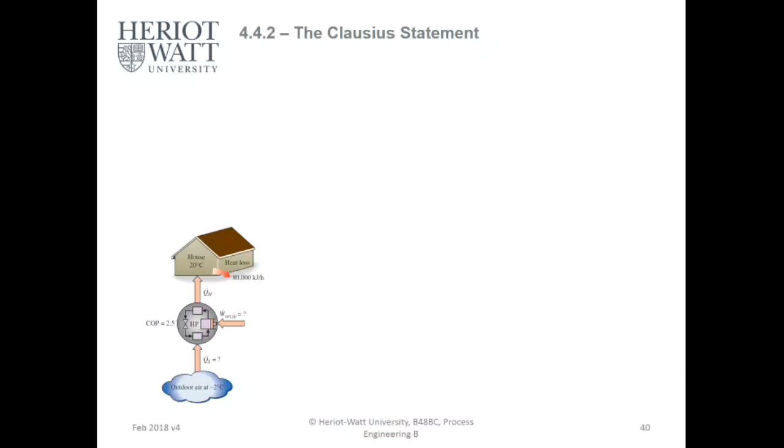Let's start with the Clausius statement. This is a continuation of the Kelvin-Planck statement, and it states that it is impossible to construct a system that operates cyclically while transferring heat from a cooler to a hotter body without a net quantity of work being supplied to the system by the surrounding.

Now, when you add this net quantity, you have a refrigeration system, HVAC system, your heat pump system. We'll get there in a bit, but let's go through the arbitrary theory behind what a Clausius statement is and how it applies to the Carnot cycle and how it applies to the thermodynamics of a cycle where you're trying to transfer heat from a cold source to a hot source.

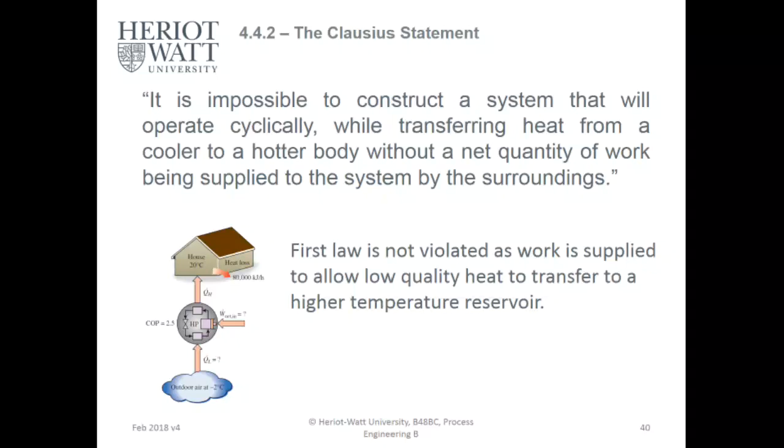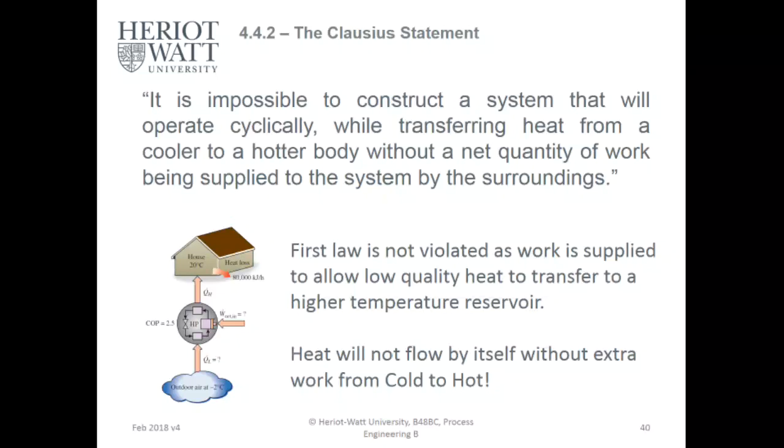Heat will not flow by itself without extra work from cold to hot. You can't heat up your coffee in atmospheric temperatures when it cools down. So heat flows from hot to cold spontaneously.

The Clausius machine, which is impossible, states that spontaneous transfer of energy, heat from a cold reservoir to a hot reservoir - it's showing that to transfer heat from a lower to a higher temperature reservoir, we must pay a penalty. We need to do some work. We need to pay the cost of that transfer.

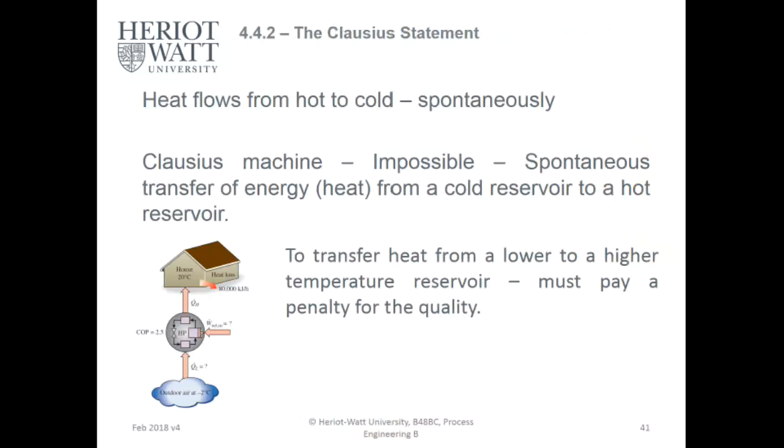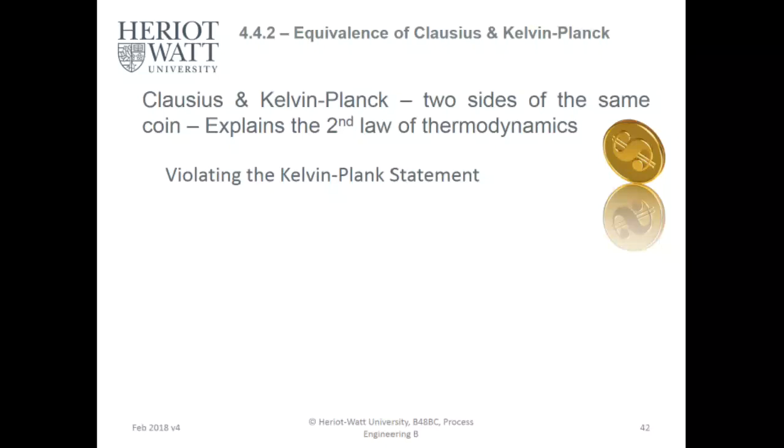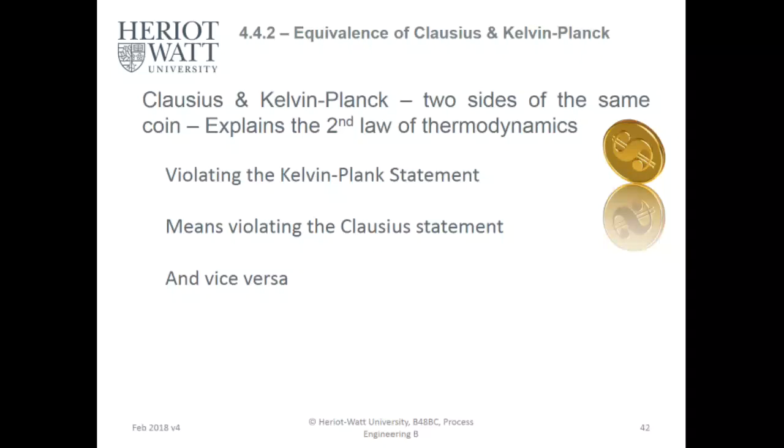So the Clausius and the Kelvin-Planck are effectively two sides of the same coin. They explain the second law of thermodynamics, approaching it from two different sides. If you violate the Kelvin-Planck statement, you'll violate the Clausius statement, and vice versa. It's like the laws of robotics by Asimov - you cannot break these laws. If you break any of them, it automatically violates the other laws. You've seen I, Robot, I assume, at least, if you haven't read the book.

The heat engine has a thermal efficiency of 1. This is in violation of the Kelvin-Planck for this system. So you have all the heat converted to work here. So you have a heat engine with 100% efficiency, and all of this heat is converted to work, being input into the refrigerator.

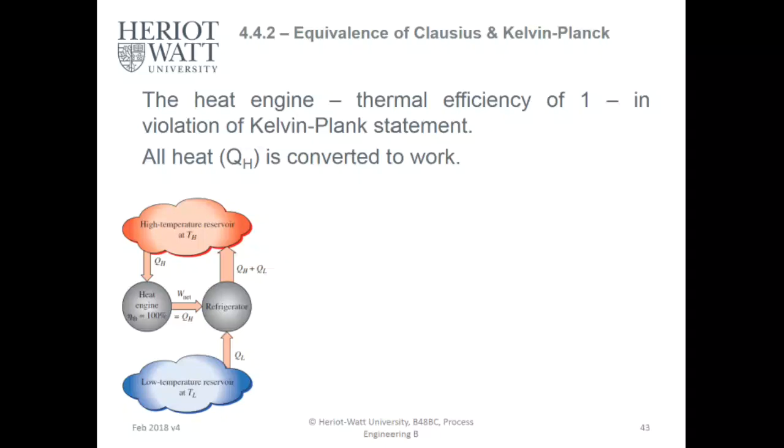Now, work is supplied to the refrigerator. It removes heat, QL, from a low source heat reservoir, so your lower quality heat, and transfers it to a higher temperature reservoir. So basically, you're cooling this in. You have cooling inside the refrigerator, but you need to dissipate that heat.

Remember, if you have a refrigerator, it's cold inside, but behind it it's quite warm. It's because it needs to dissipate that heat somehow. So it removes the heat from the cold side, from inside the refrigerator, and throws it out. Remember, energy cannot be created or destroyed. You can transfer it, but you can't destroy it. And you reject this heat, which is the lower quality heat, plus the higher quality heat to the higher temperature reservoir.

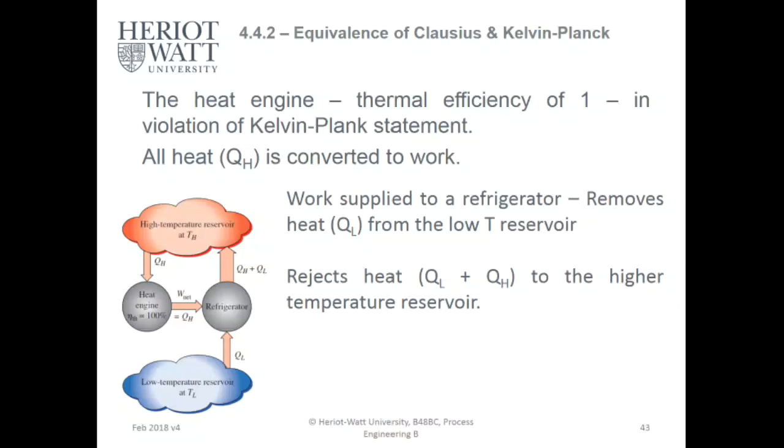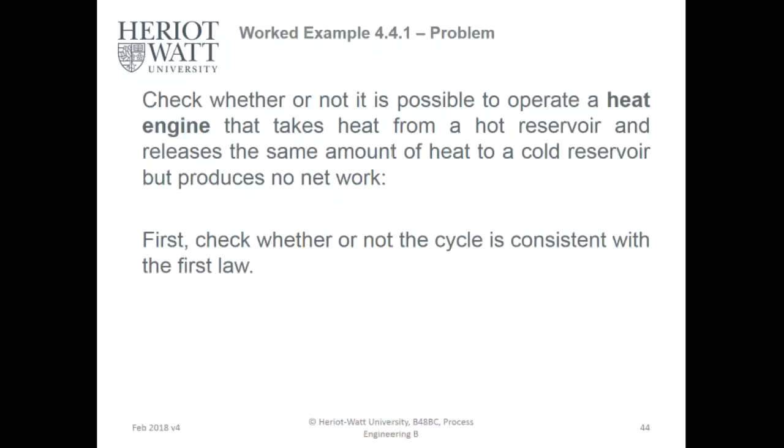Now, check whether or not it is possible to operate a heat engine that takes heat from a hot reservoir and releases the same amount of heat to a cold reservoir but produces no work. Is this possible? First, check whether or not the cycle is consistent with the first law, and then check whether or not this cycle violates the second law.

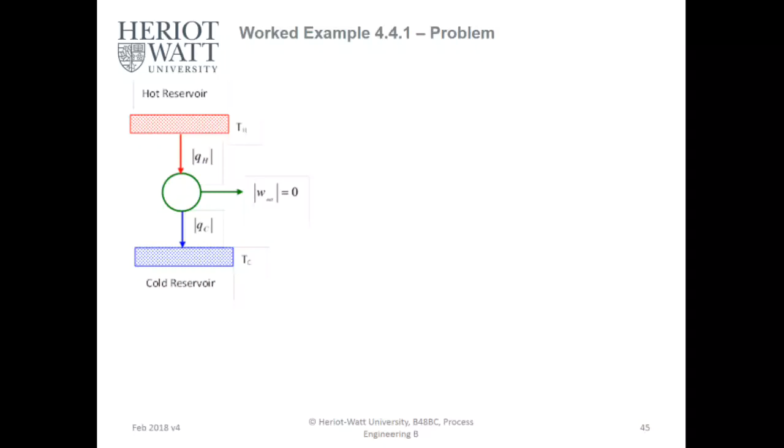So the heat is spontaneously flowing from a high to a low temperature. Now this is just to emphasize the point - I know it's quite arbitrary and a lot of you understand it, but just so it's emphasized. No work is done by this cycle, so think of it as your hot coffee cooling down while you're drinking it. So the heat is transferred to the atmosphere, despite the fact that there's some form of insulation on your Costa coffee cup.

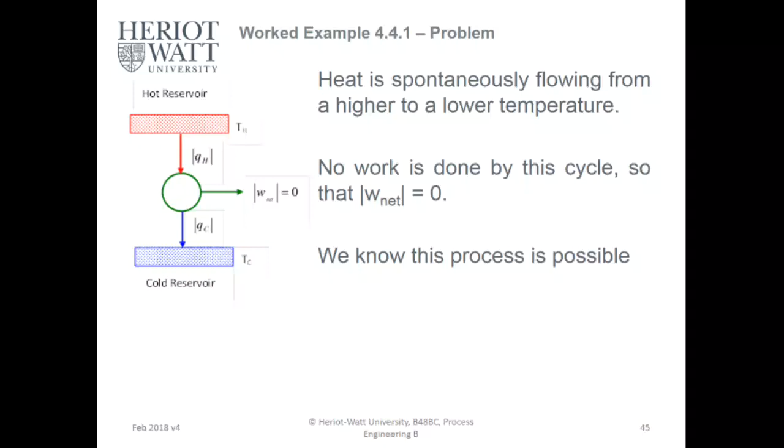We know this process is possible. You've seen it - you guys are seeing it at the moment. The first law may be applied to this cycle by examining the energy flows entering and leaving the working fluid. And the energy flows are absolute values, and their directions are indicated by the arrows.

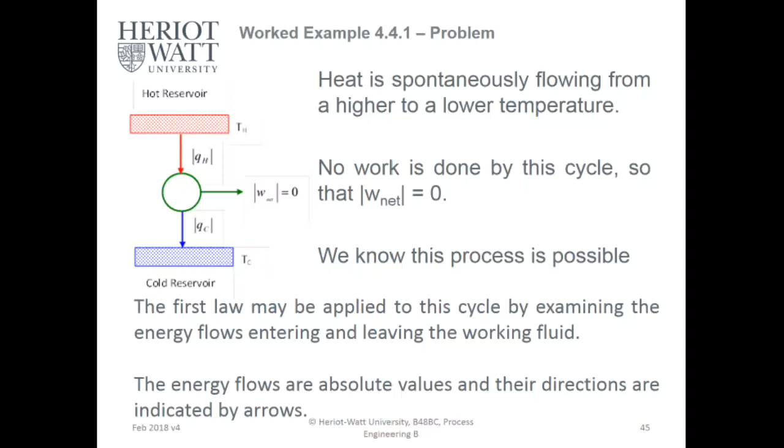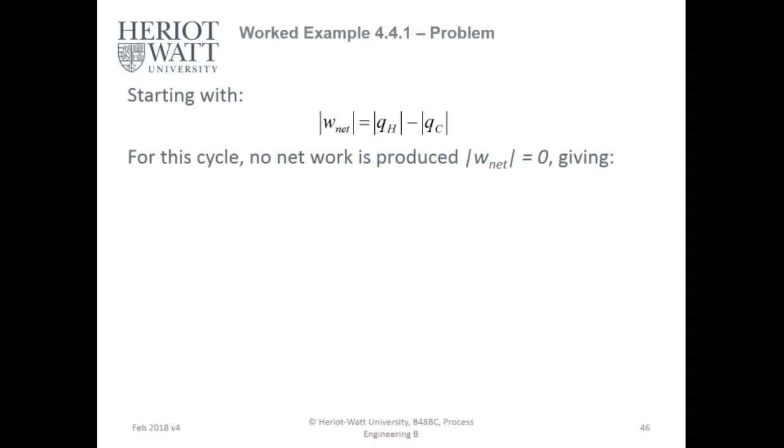So if you see from a hot reservoir going to a cold reservoir, or your coffee cooling, your hot reservoir is your coffee, and the cool reservoir is the classroom. Starting with net work equals the higher quality heat minus the lower quality heat, or the quantity of heat. For this cycle, no net work is produced, so net work is 0, giving QC equals QH.

This heat engine, even though it's useless because it's not doing any work, does not in any way violate the first law. Energy is still conserved even if no useful work is done. So you're transferring all the energy from your coffee to this room, but you're not destroying any energy. You're just heating up this room, which is then cooled down by the HVAC system.

So you need to remove that heat. You do work - that's your refrigeration part. So you're actually contributing to global warming right now.

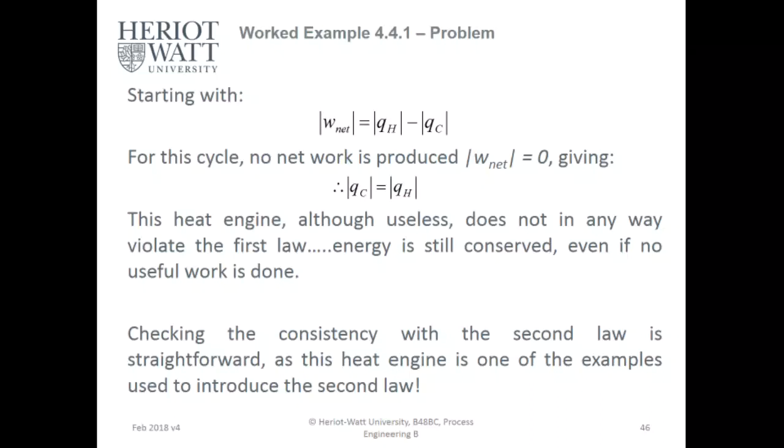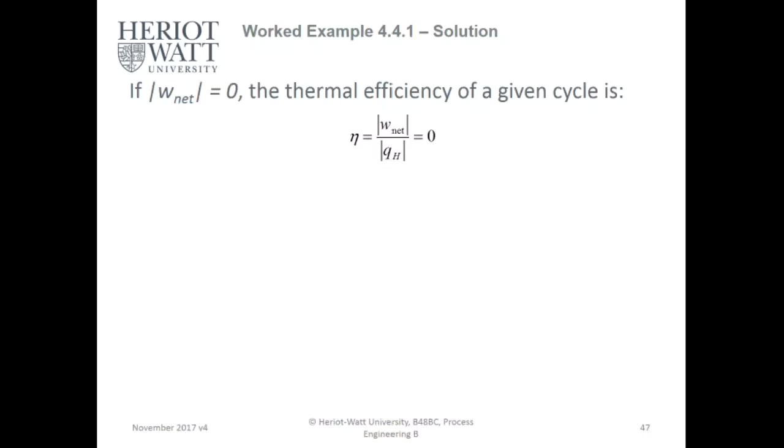Checking the consistency with the second law is quite straightforward. This heat engine is one of the examples used to introduce the second law. So if you have zero amount of work, the thermal efficiency of this cycle is the net work over the higher energy, which equals zero.

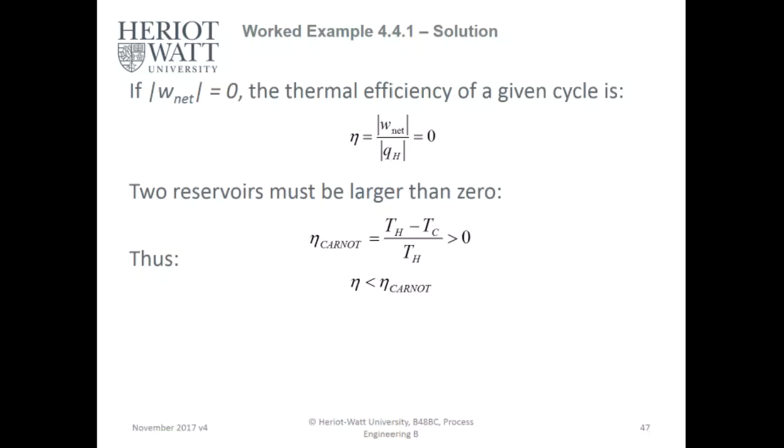Or rather, it's not 100% efficiency, but you're losing absolutely no heat. It's never 100% efficiency. So the cycle is feasible, it's spontaneous, and doesn't violate the second law because it's less efficient than the Carnot cycle. And it's a reversal, or a reversal of its reversal.

A Clausius machine is not possible. So you can't reverse heat back into your coffee.

The results also show that heat transfer through a finite temperature difference is irreversible. So again, coffee's cooling down, you can't heat it up at room temperature without some kind of work input.

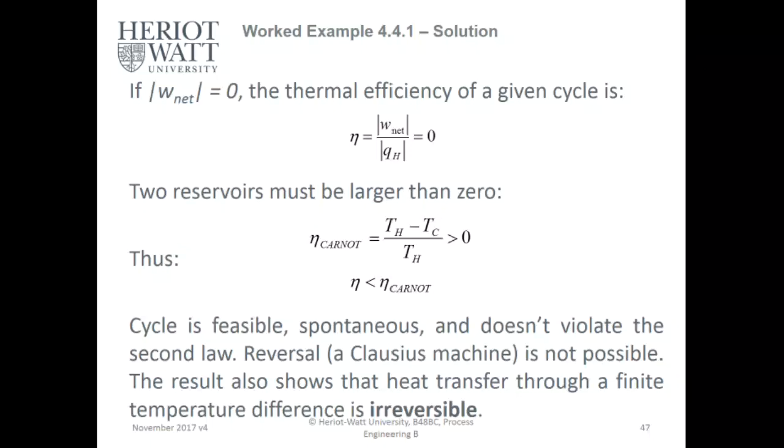Looking at the energy quality, you can see that the cycle transforms higher quality heat at a higher temperature to lower quality heat at a lower temperature. Now remember, higher quality and lower quality are conceptual terms. They're not going to come up in the exam, but the reasoning helps you understand what heat pumps and refrigeration systems are.

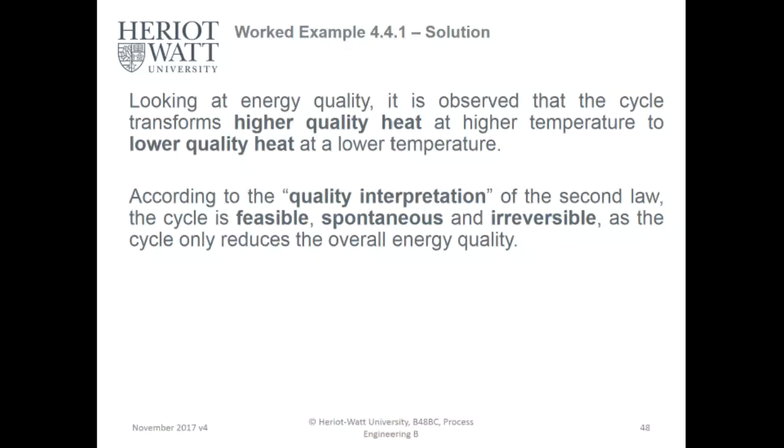According to the quality interpretation of the second law, the cycle is feasible, it's spontaneous, and it's irreversible. So all real life processes are irreversible, as the cycle only reduces the overall energy quality. It's irreversible when you reduce the overall quality of the energy.

And the cycle is irreversible because it extracts none of the work that transferring this amount of heat is capable of doing. The only time you can achieve this is in a perpetual machine, which again is impossible thermodynamically.

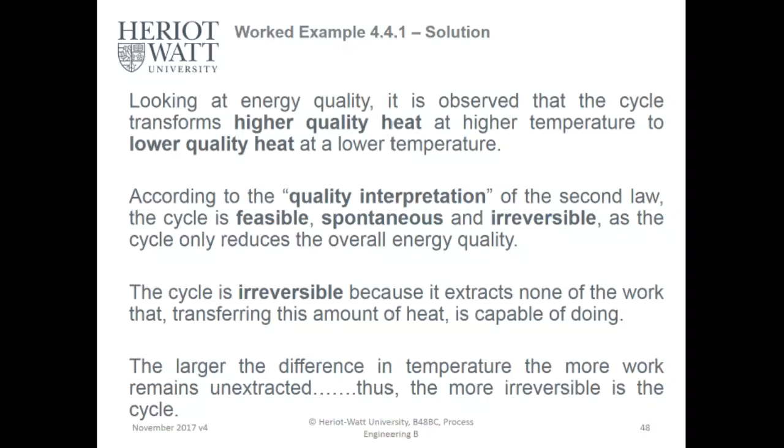So the larger the difference in temperature, the more work remains unextracted, thus the more irreversible the cycle. So the larger your temperature differences, the harder it is to go back, because you can transfer more of this high quality energy to a lower quality energy.

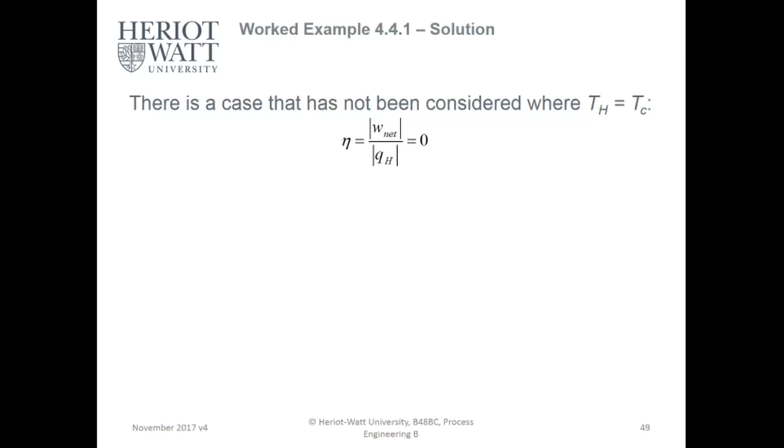There's a case that has not been considered when the higher temperature equals the lower temperature. So both your reservoirs are at the same temperature. So if the efficiency is zero, and the Carnot is now also zero.

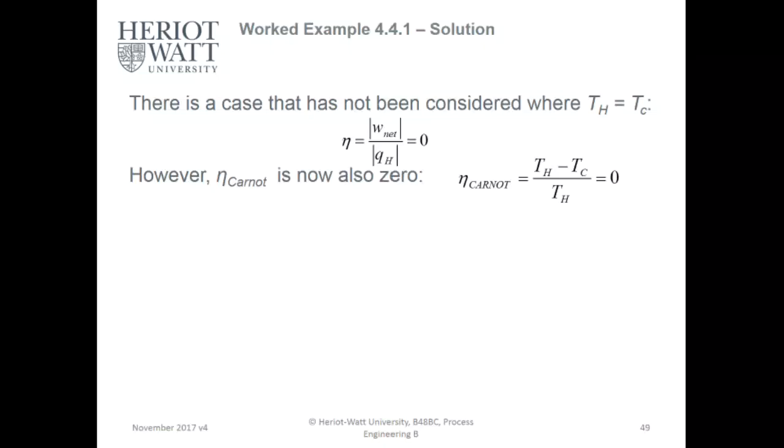So your TH minus TC over TH equals zero. The two efficiencies are equal. Thus, for this special case, the cycle is reversible because the two temperatures are exactly the same and no work can be extracted. This is also consistent with the energy quality interpretation of the second law, as there is no change in quality and no driving force.

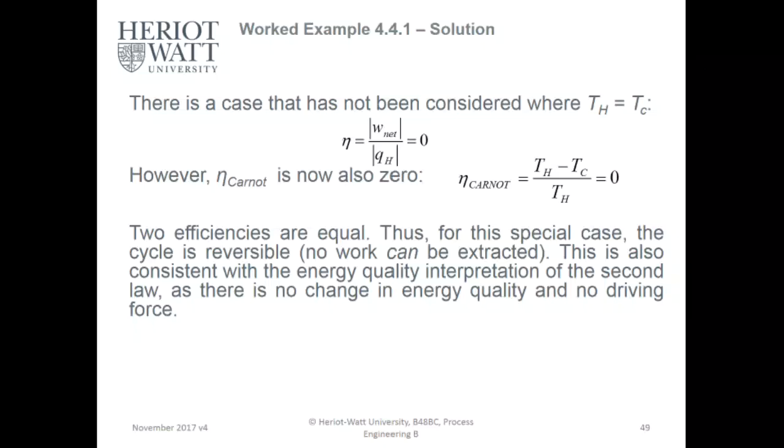So this in reality is absolutely impossible, because you cannot go from a high temperature, or rather the same temperature, to each other, because there's no heat transfer, there's no work done. So it's your absolute Carnot cycle. And the transfer of heat through an infinitesimal temperature difference is reversible.

So if you assume there is an infinitesimal difference between these two temperatures, let's say you have a reservoir at 20 degrees Celsius and your hot reservoir is at 20.00000001, that's your infinitesimal. We can make an assumption that it's reversible, but again, in reality it's not.

In the previous case, heat transfer through a finite temperature difference was irreversible. So if it's a finite temperature difference, if something is cooling down, it's irreversible. But then if it has a constant temperature, it means there is some form of work being done on it.

So it's still reversible, but you have this constant temperature, unless you assume your system is something infinitesimal and the entire universe is your system. Again, like the balloon question from the first tutorial.

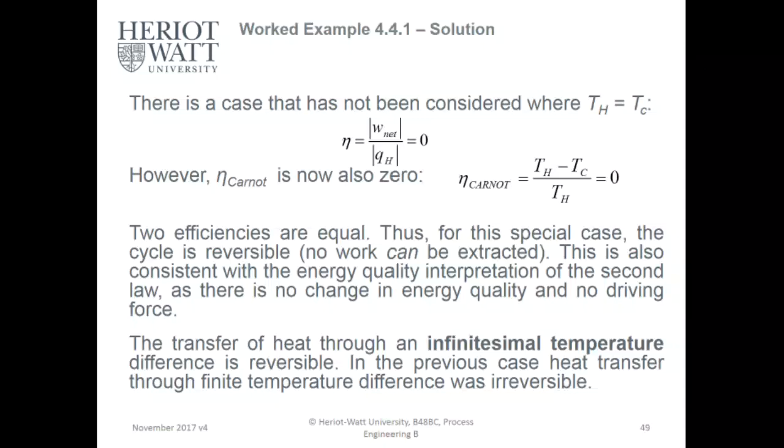So if the whole world is your system, and you have heat transfers to an infinitesimal object as opposed to the whole world, then you can assume it's reversible, because the system constantly provides that heat, but still losing energy, or converting energy rather.

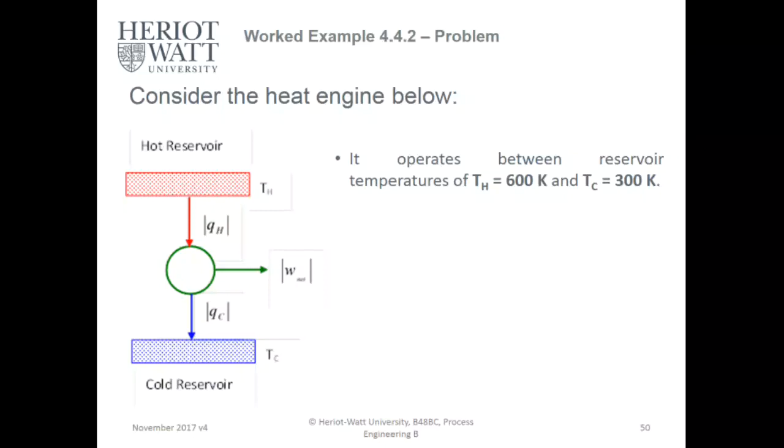So if we consider this heat engine, it operates between a reservoir temperature of 600 K hot and 300 K. Check whether or not it's possible to operate this heat engine with the energy flows of QH, your energy flow from the hot reservoir, at 100 kilojoules per kilogram, and your work input of 60 kilojoules per kilogram, your net work output rather. So it's effectively an energy balance.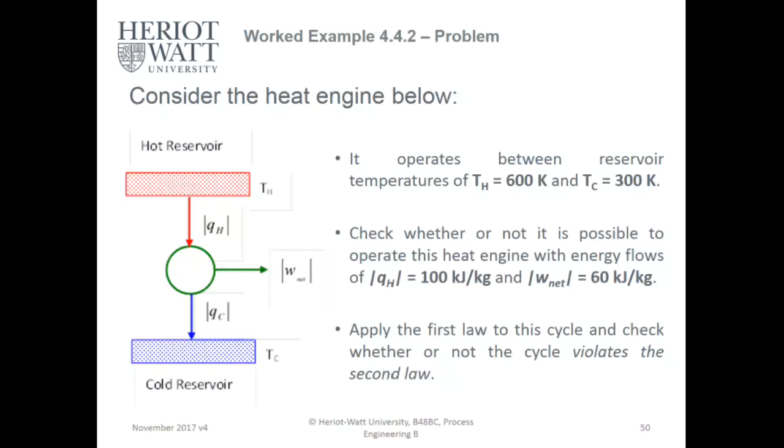Apply the first law to the cycle and check whether or not the cycle violates the second law. You guys have done energy balances, right? Okay, it's part of your process design course too.

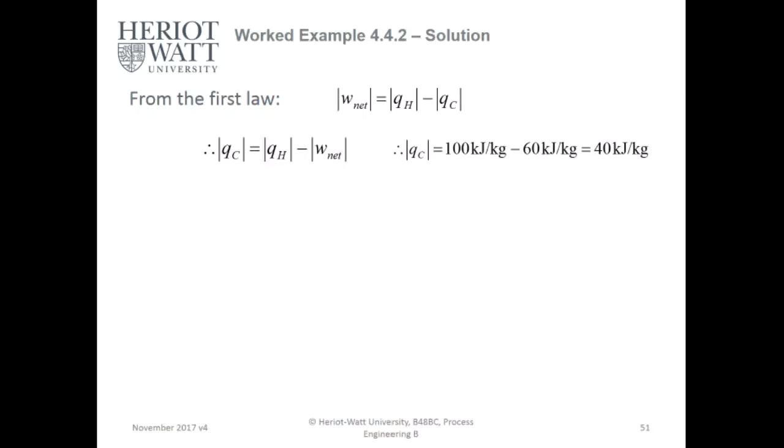From the first law, your net work equals QH minus QC. So your QC equals QH minus net work. Your QC is 100 kilojoules minus 60 kilojoules, equals 40 kilojoules. That's the amount removed from or put into the colder reservoir, the lower temperature reservoir. The first law has been applied to the heat engine cycle and energy is conserved.

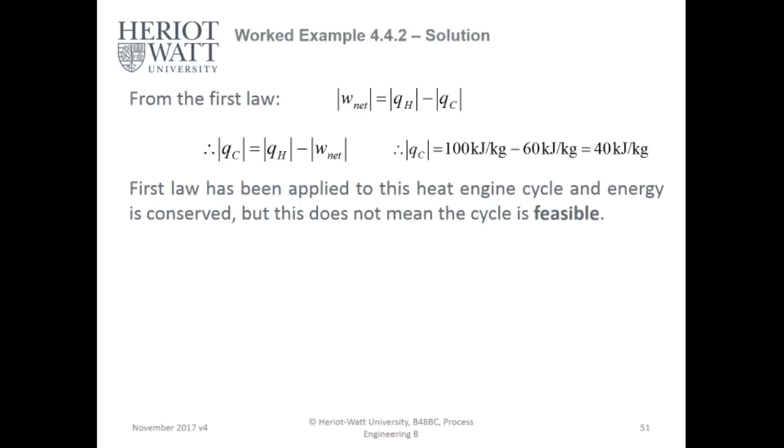So you have conserved this energy, but that does not mean the cycle is feasible. You know that if you remove 60 kilojoules, you'll have 40 kilojoules going into your colder reservoir. The simplest way of checking compliance with the second law is to use thermal efficiency.

Now we know thermal efficiency is the net work over QH. So it's 60 over 100, which equals 60%, or 0.6. And we know that for the Carnot cycle, we can calculate the Carnot cycle efficiency, which is TH minus TC over TH, 600 minus 300 over 600, which is 0.5. Do you think this is feasible?

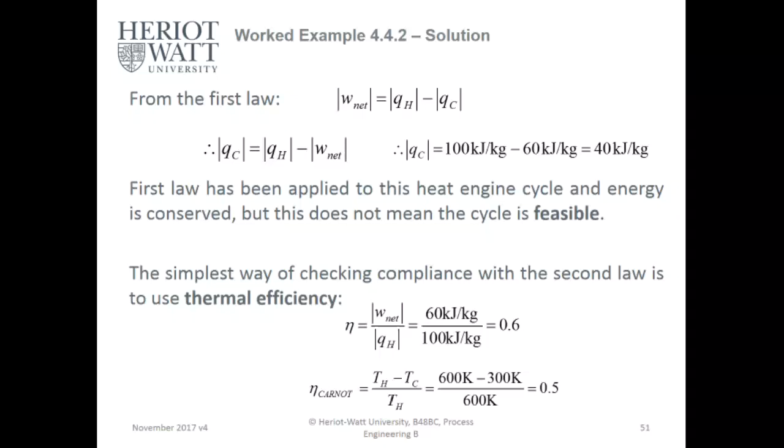Because this is larger than the Carnot cycle efficiency, but it was shown before that the highest energy efficiency possible between any of these two heat reservoirs is a reversible cycle. This cycle clearly violates the second law because you cannot go over the efficiency of the Carnot cycle, your ideal system. So your second law effectively states that you can never work hard enough. It's like life - you can never work hard enough to achieve something, but you can get as close to it as possible. There's no such thing as perfection.

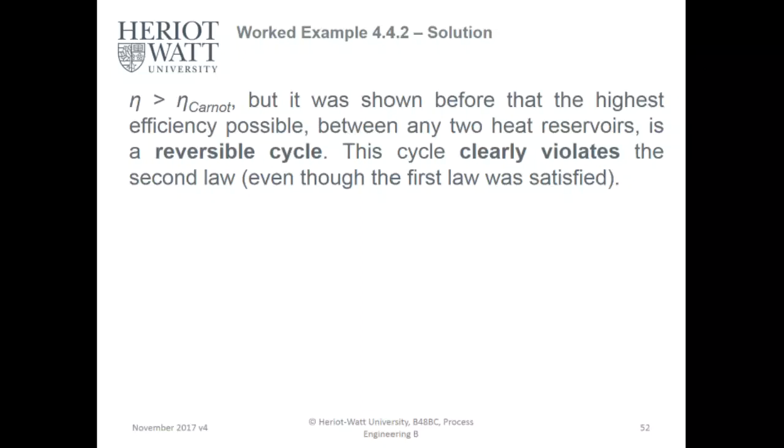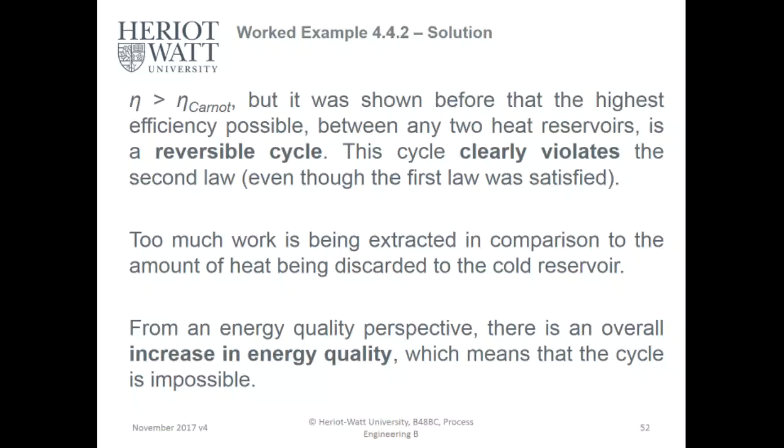Too much work is being extracted in comparison to the amount of heat being discarded to the cold reservoir. So from an energy quality perspective, there is an overall increase in the energy quality, which means the cycle is impossible. You're increasing the overall quality of the energy, and you have more energy coming out in the form of work. So you can't have more heat coming out than the amount of work and heat put in.

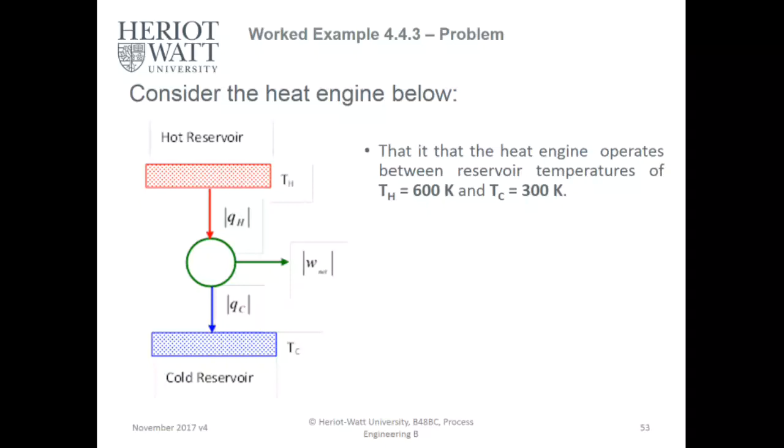Now, this might be counterintuitive when we get to the refrigeration part, so we'll get there. Consider the heat engine below. The heat engine operates between 600 and 300, and the net work this time is 50 kilojoules. Is this going to be possible?

So applying the first law again, we find QC equals 50 kilojoules, and checking using efficiency, we know the Carnot cycle is 0.5. So is this possible? Well, I'm saying it's possible as well. But basically what it means is this cycle is fully reversible because it has the same efficiency as a Carnot cycle. So it can also be concluded that the cycle is reversible.

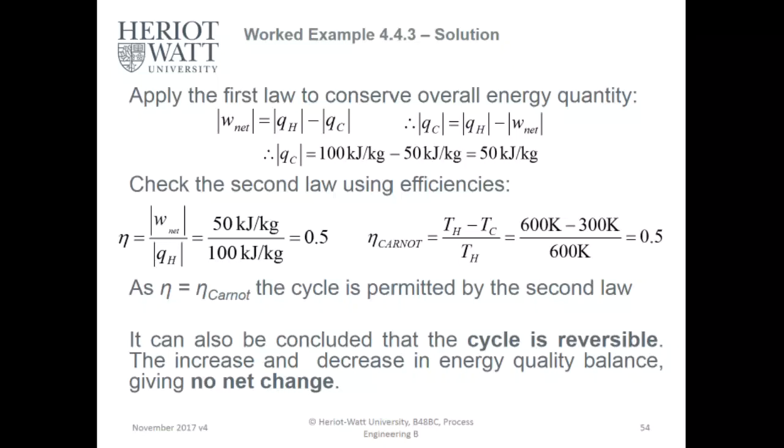This increases and decreases energy quality balance, so with no net change. There's no net change of energy. Again, in reality, an impossible system, but your Carnot cycle is your ideal system.

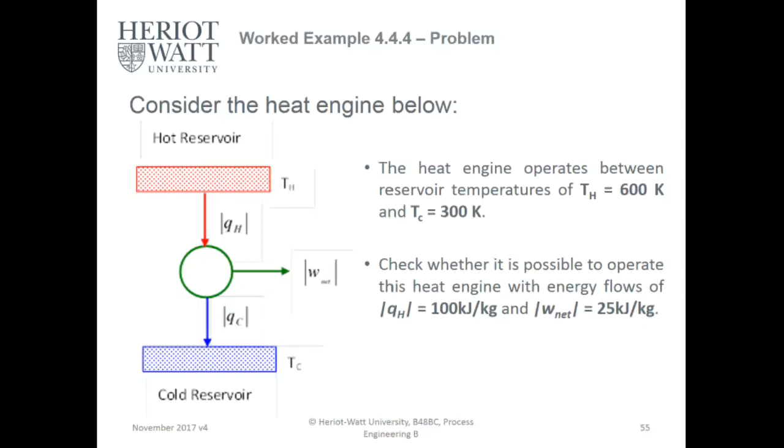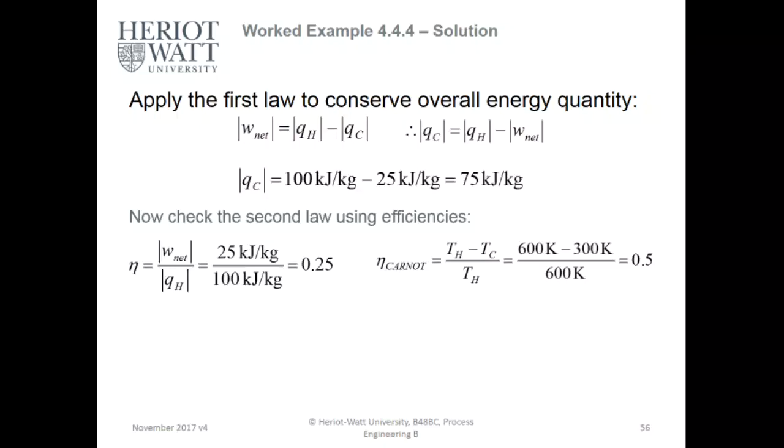If we consider the same thing, but with a net work of 25 kilojoules, and apply the same law, we find that the QC is 75 kilojoules. So this time we're losing more energy. And if we check again, our efficiency will be at 25%. So this is definitely a system that is possible and more in line with reality.

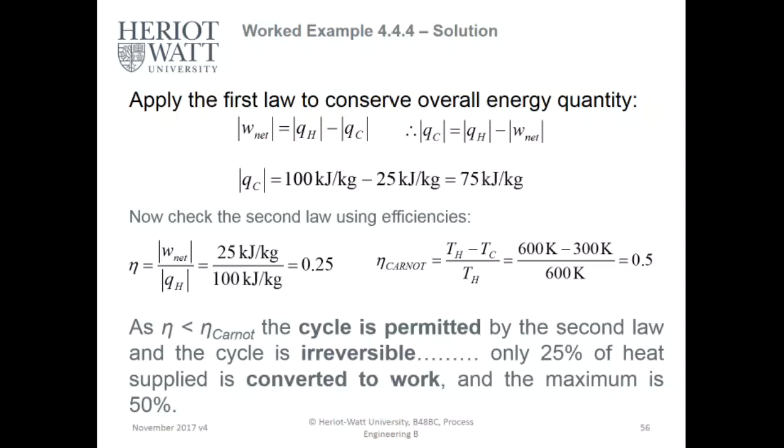Now, this is the kind of system - this is basically similar to your car engine, petrol car engine. Well, they're becoming a little more efficient, but typical car engines are 25, 29, 30% efficient, with the exception of the Mazda engines, which are significantly more efficient with petrol.

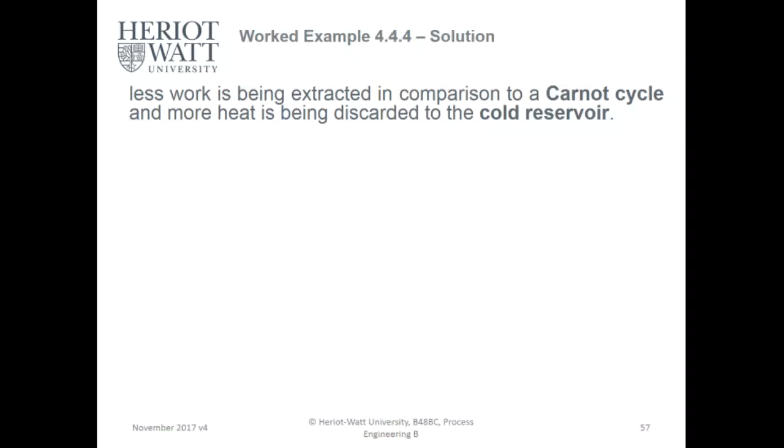So less work is being extracted in comparison to a Carnot cycle, and more heat is being discarded to the cold reservoir. The decrease in quality when moving a large amount of heat from hot to cold reservoir is more than the increase in quality. when net work is produced from heat - you're producing this work from heat. And overall, taking both effects into account, there's a net decrease in energy quality, so you're decreasing the quality of that energy.

If you think of it as having high pressure superheated steam at 500 centigrade, or low pressure, low quality steam - and that's what they call it, low quality steam - at 60 degrees and let's say a pressure of 0.6 bar, the usefulness of these two types of steam are quite different. The quality is different, so you can look at it as your product and think of it as the quality of that product. In a refinery, you have your superheated steam, but sometimes because you cool it down overall, this might be useful to your process design.

When you cool it down to, let's say, 60 degrees and sub-atmospheric pressure, you need to find a use for that, because still you put work into it, so it costs money. So you can change the quality by either putting work in or converting it to something useful.

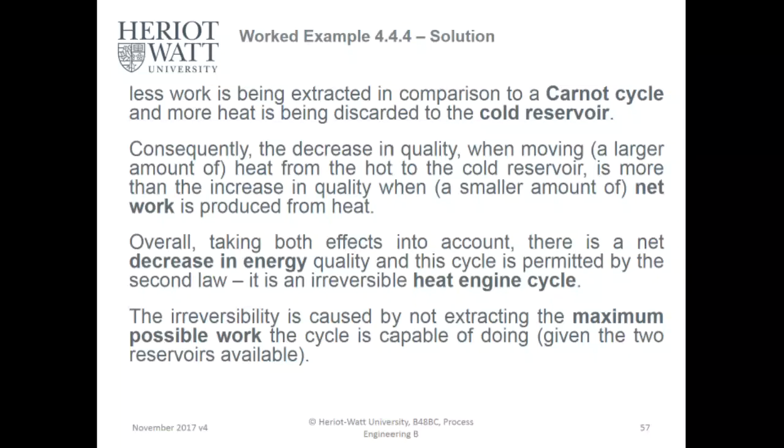A Carnot heat engine - okay, let's go with a question. A Carnot heat engine receives 500 kilojoules of heat per cycle from a high temperature source at 652 degrees and rejects heat to a low temperature sink at 30 degrees. What is the thermal efficiency of the Carnot engine? I'll let you actually calculate that.